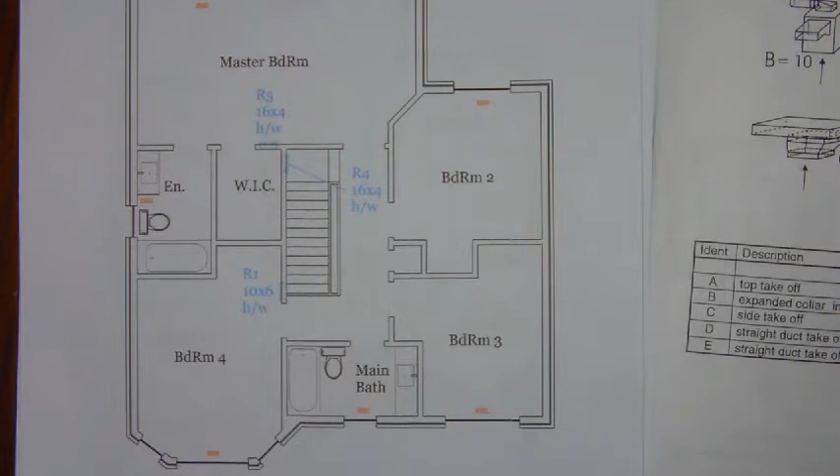When we examine the return airs down in the basement, you should notice there is a cross symbol, which tells you the return air is originating on the second floor. If we examine the second floor, we can see R1 is at the top of the stairs, centrally located in the hallway, and R5 is located in the master bedroom.

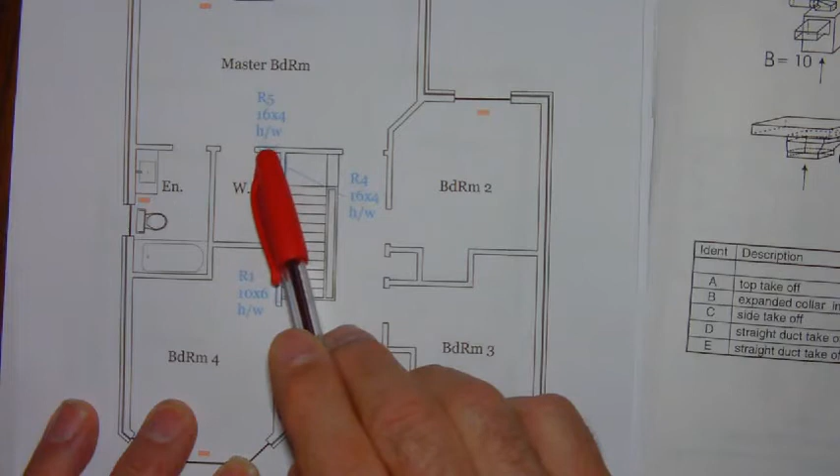Typically on a second floor, we want to place the grills in a high wall position so that the bottom of the grill is approximately 1 foot down from the ceiling. Generally, that leaves the high wall grill at approximately 7 feet above the floor level of the room it's in.

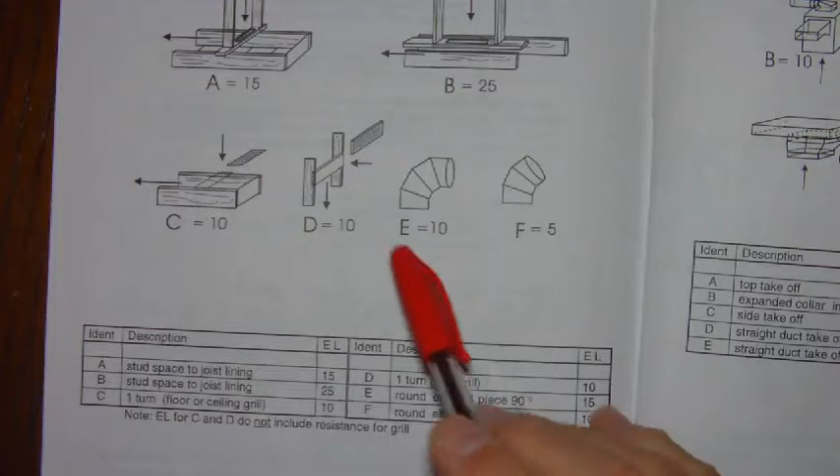Now we can see both of these grills are going to be the same, so they will be high wall grills, and so we would be looking at a D10 fitting. That's simply a grill on the side of the wall.

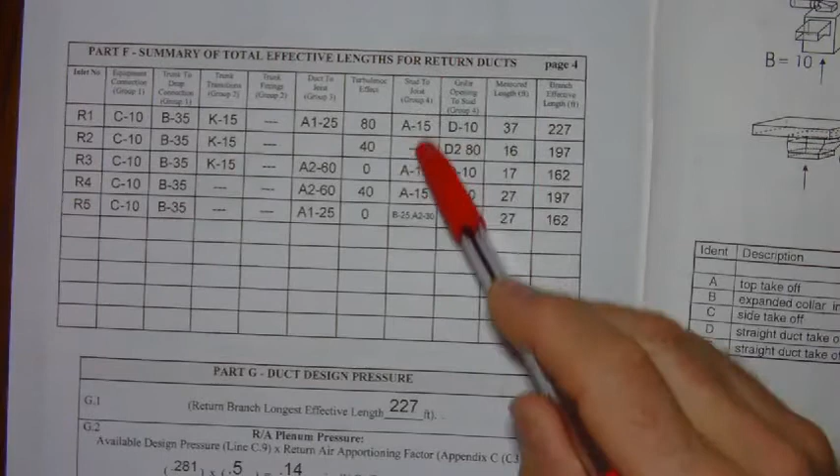So when we look at our equivalent length, we can see we've got the 2 D10 fittings there. The next is our stud to joist.

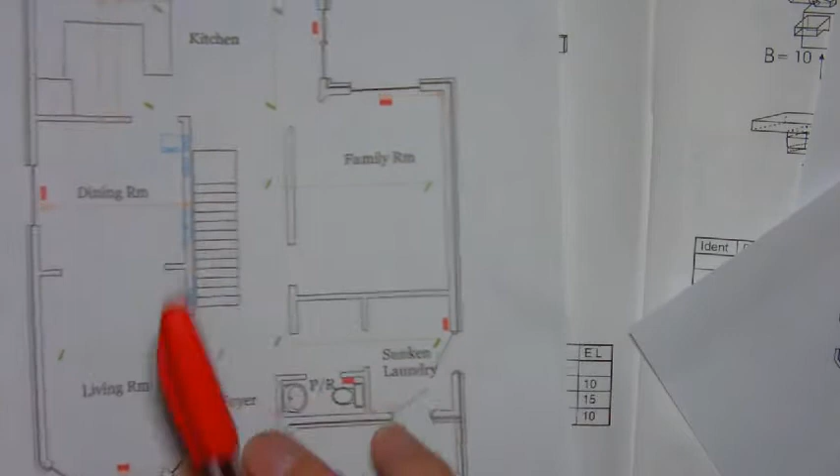If we examine R4, we see that R4 originates here at the top of the stairs. As it travels down towards the basement, it simply travels straight down through the second floor wall, straight through into the first floor wall, straight down into the basement, where it turns and jogs over to the return duct.

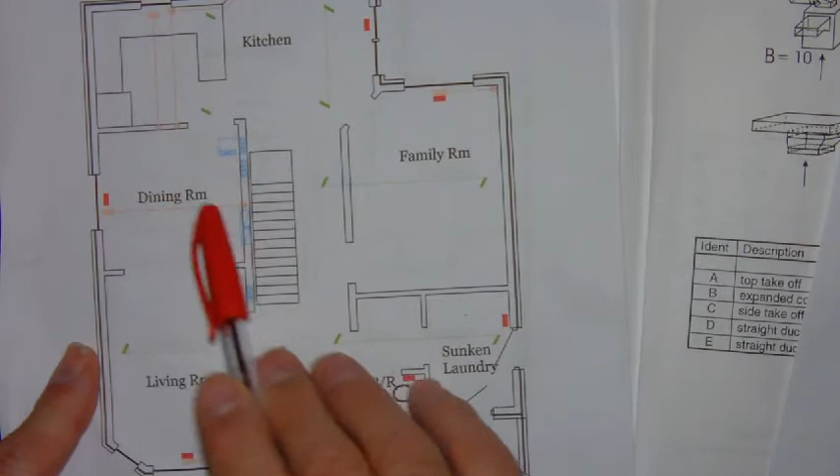For R5, we can see that R5 is in this partition. When we look at the first floor, we should notice that the return air is coming down parallel with the floor joists in the ceiling of the dining room. That means this wall is running parallel with the floor joists in the dining room ceiling.

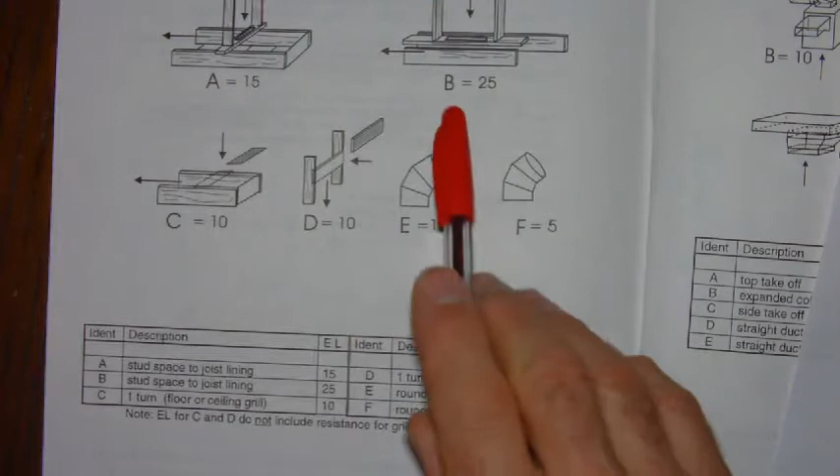Because of that, you need to use fitting B25. You'll notice that the wall is parallel with the floor joists.

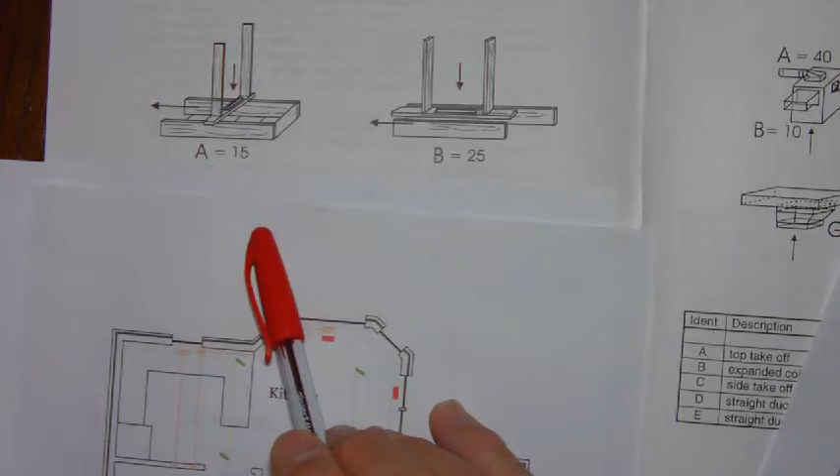However, very shortly thereafter, the air has to turn into the top of this wall, so now we are back to the A15 fitting. As we continue further down into the basement, we encounter a second A15 to allow the air to travel through the joists over to the return duct.

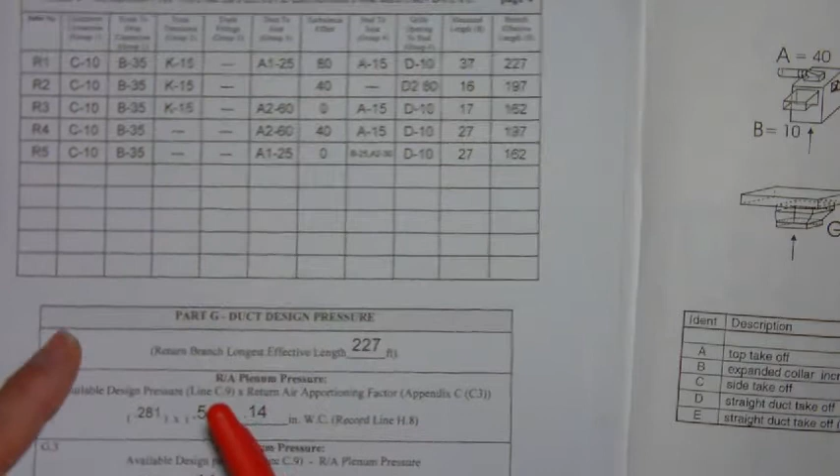So for R5, we can see there's one B25 fitting and an A2 at 30, that would be 2 times 15 feet.

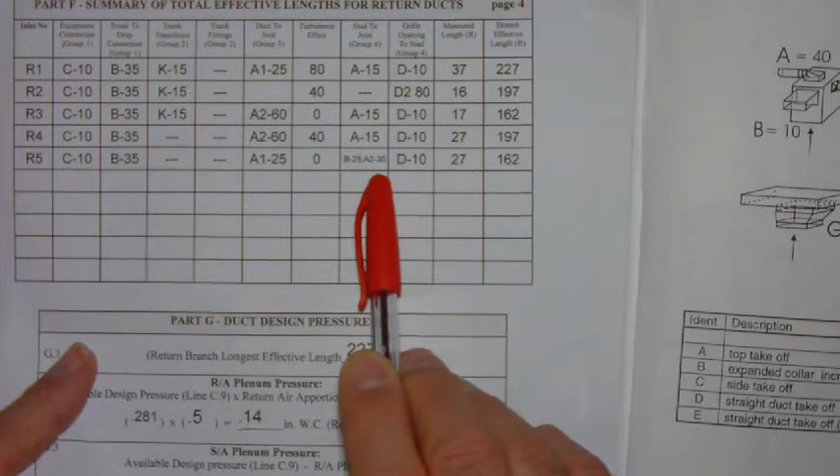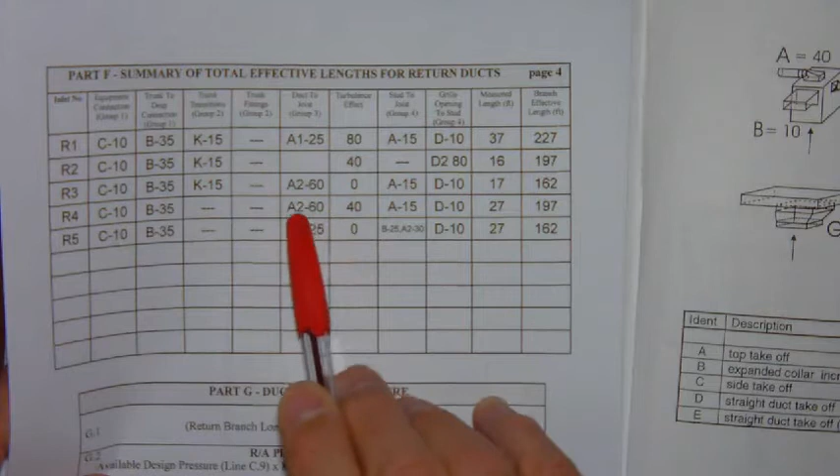Now for R4, the air is entering the duct somewhere between the furnace and the most remote, so we would be using an A2 that's worth 60 feet. The turbulence is a bit debatable as to whether there is in fact turbulence here.

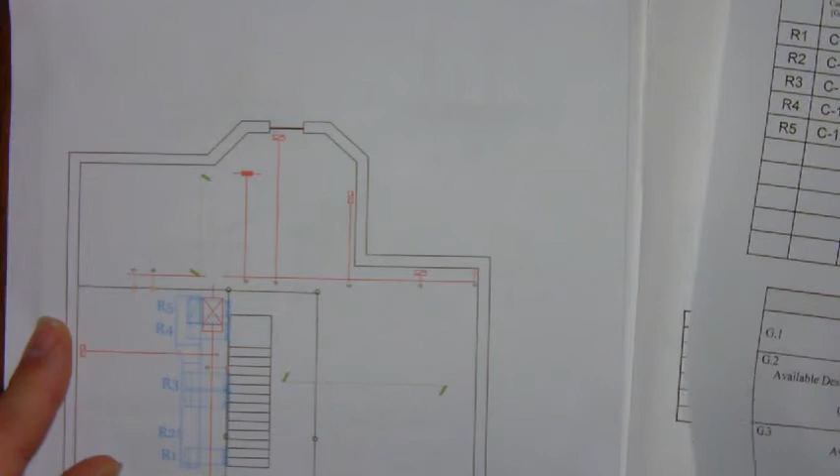The air from R4 only travels a very short distance before it starts to enter the return duct. However, R5 is in close proximity and could present some turbulence effects, so rather than err on the small side, we would include 40 feet just to be on the safe side.

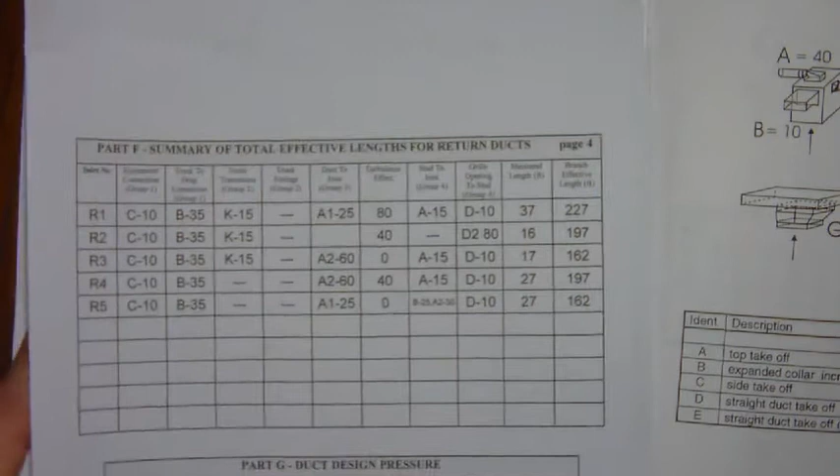Once again, the air must travel through the expanded collar and the base elbow, but notice now the air is entering the duct beyond the transition. The transition is no longer affecting either R4 or R5, and therefore it is not included in these calculations.

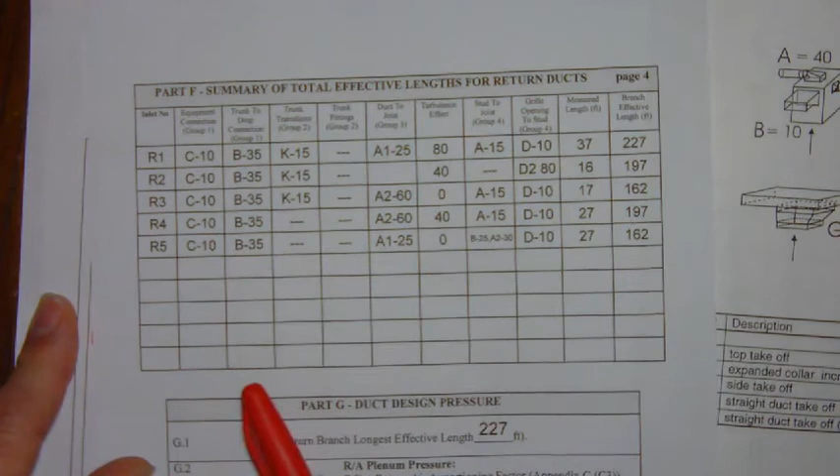When we measure the total distance of these runs, don't forget that on drawings like this, you can only measure the horizontal distances. So always remember that with a typical second floor return that is approximately 7 feet high on the wall on the second floor, you will have a total of 23 feet of vertical height that you must include in the overall length of these runs.

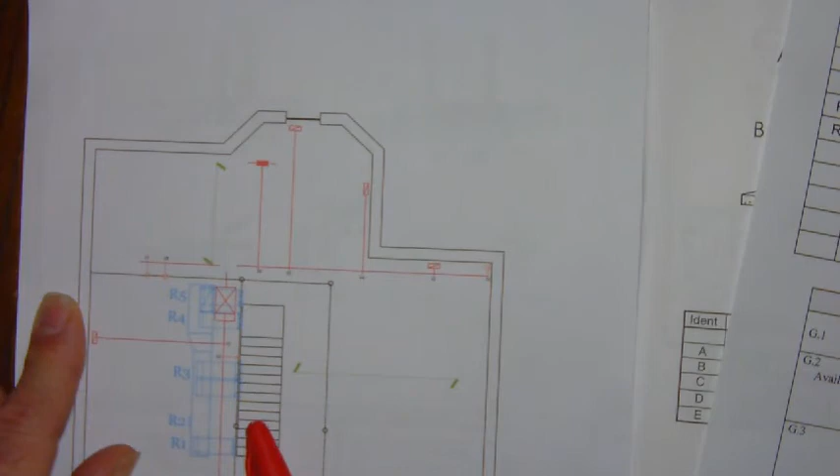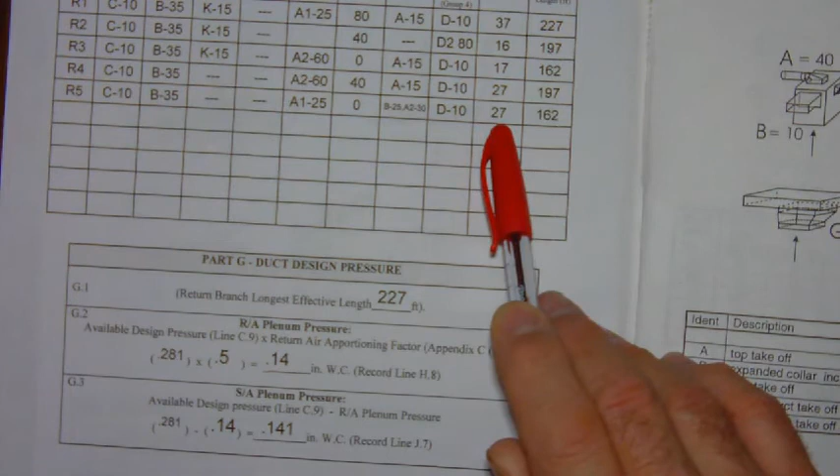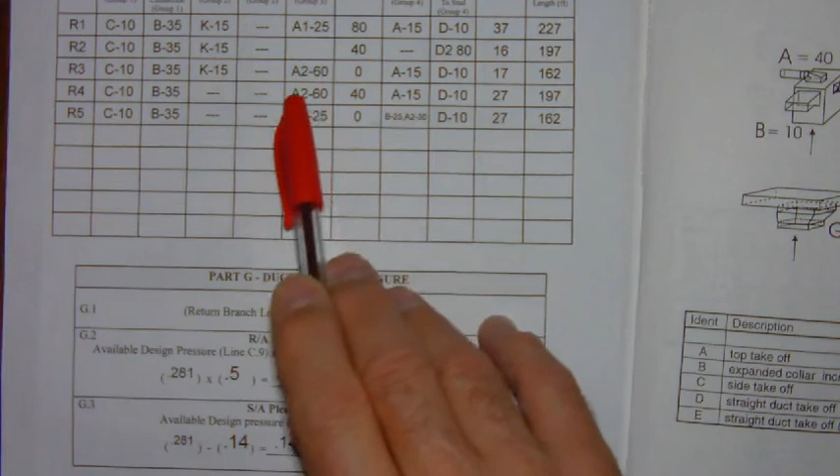When we do our measuring, we find, just as pure coincidence, both runs equal 27 feet of actual length. However, with the additional joist to duct fitting and the turbulence, the effective value for R4 is quite a bit higher.